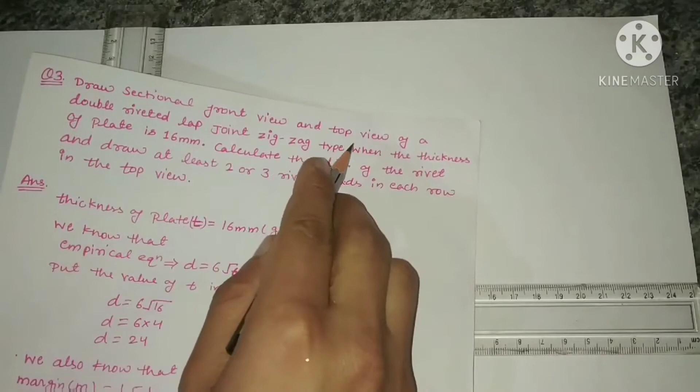So similar to the second problem, we are going to solve a double riveted lap joint. But the difference is, in the second problem we discussed a double riveted lap joint of chain type, and in this session we are going to discuss a double riveted lap joint of zigzag type. Now let us look into the question.

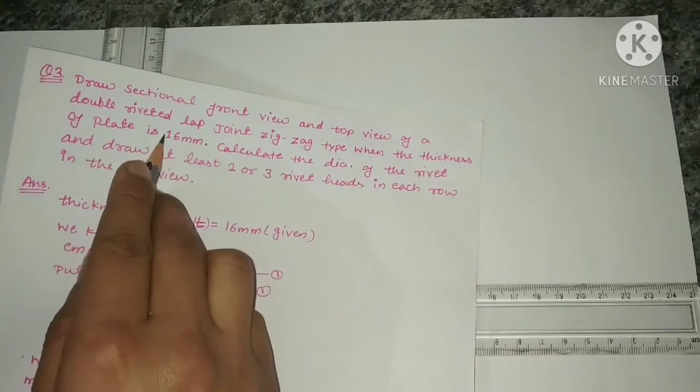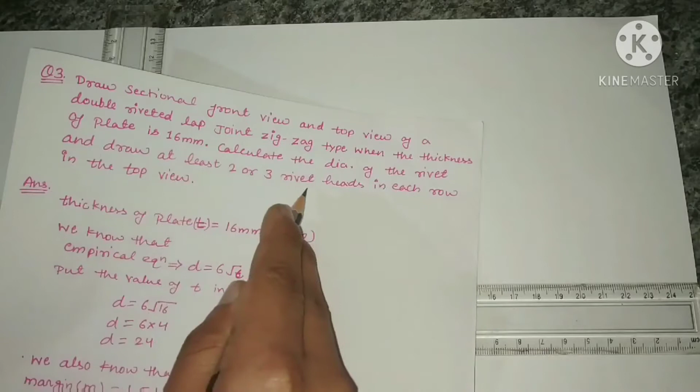Draw a sectional front view and top view of a double riveted lap joint, zigzag type, when the thickness of plate is 16 mm. Calculate the diameter of the rivet and draw at least 2 or 3 rivet heads in each row of the top view. In this case, thickness of the plate is given as 16 mm. We are supposed to find out the diameter of the rivet.

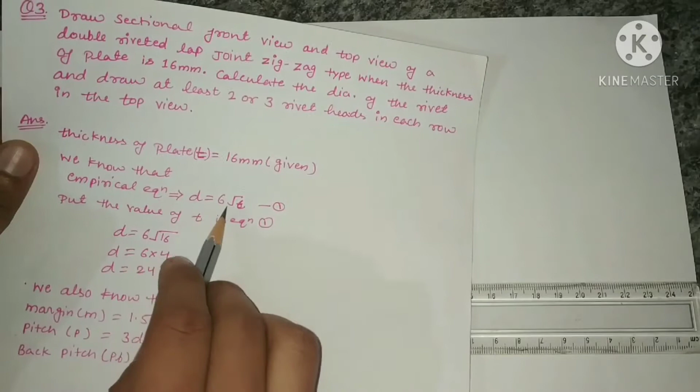So we know the formula, that is D is equal to 6 times root T. Substitute the T value, that is D is equal to 6 root 16. Root of 16 is equal to 4. D is equal to 6 into 4. You will get the value as 24. So the diameter of the rivet should be 24.

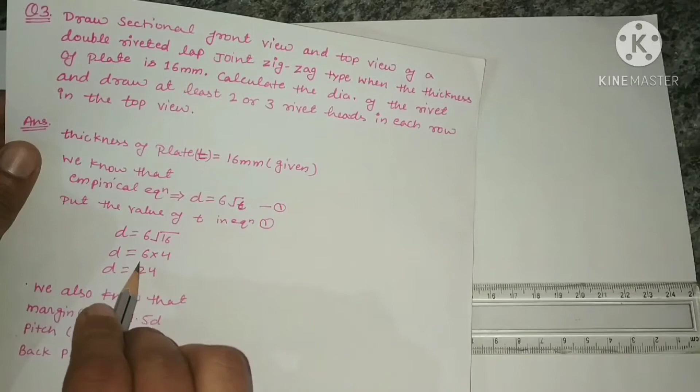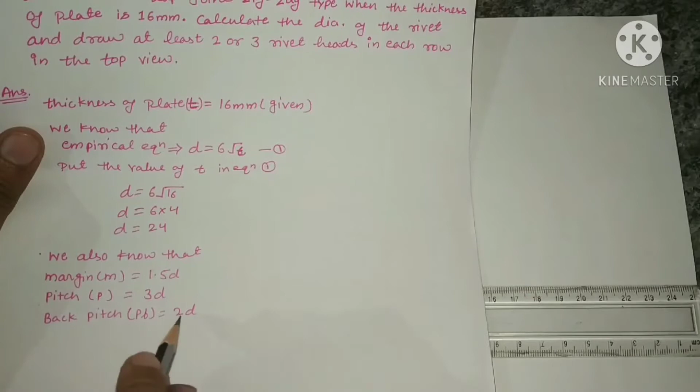Now calculate the margin. Margin is equal to 1.5 times the diameter, and pitch is 3D, that is 3 into 24. Here diameter is 24, so instead of 18 substitute it as 24. And back pitch, that is the distance between two center lines, is equal to 2 times the diameter. So 2 into 24 is 48 mm.

So to start with the construction of rivets, as a first step, draw a vertical line. This is a double riveted lap joint and it is of zigzag type. All the steps will be same, only in the top view we are going to make some minor changes. So consider a straight vertical line, and by considering the back pitch, that is 2 times the diameter, 2 into 24 is 48, consider the distance of 48 mm and draw a second vertical line. These two lines help us in identifying the center lines of the rivets.

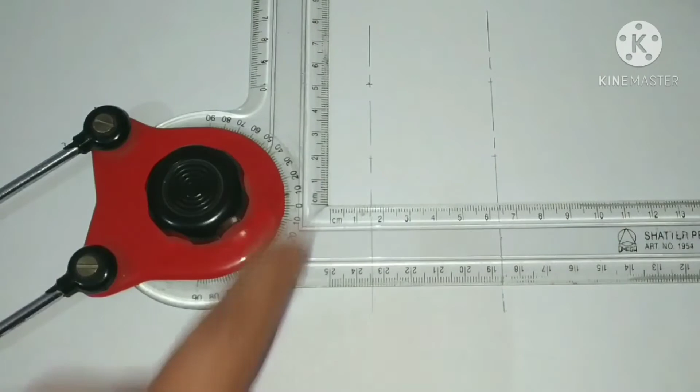By considering these two center lines as a reference, consider the thickness of the plate now. That is, mark any point on the top of the center line, measure 16 from that point and draw one more point. This gives you the height of the rivet. Now this 16 mm will help you to draw the plates. We have to draw two plates. Each plate is of 16 mm thickness. So you should draw 16 plus 16 as the height of the rivet.

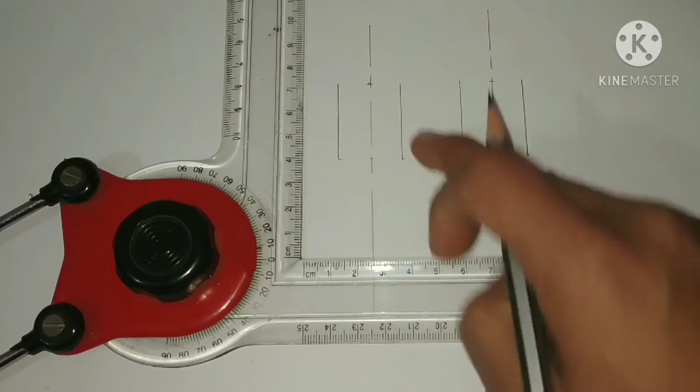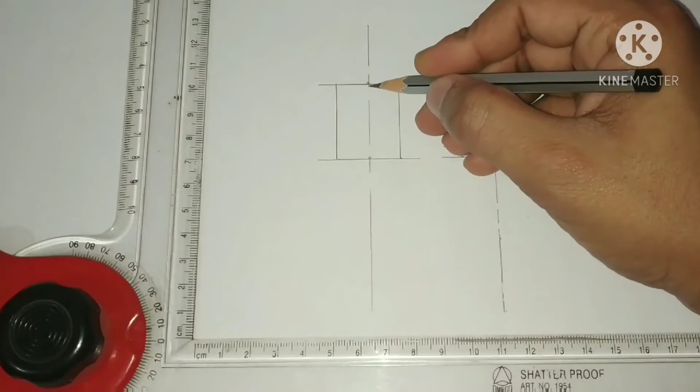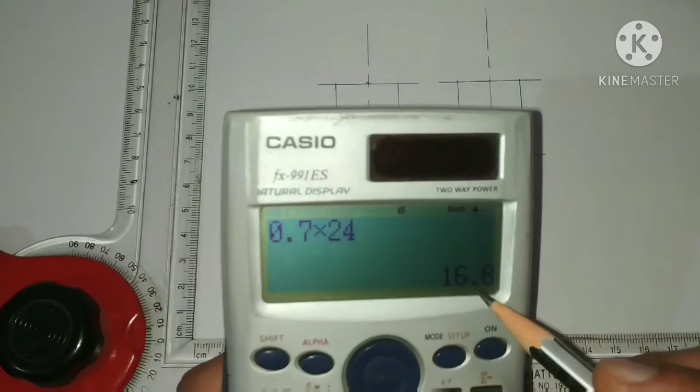So draw 12 on the left side and right side of the center vertical line. And in the same way, after drawing these lines, construct the rivet head. That is, after completion of the rivet body or shank, draw the rivet head. Now again we are going to make use of the formula 1.6 times the diameter, 1.6 times 24. Draw a straight line at the extreme ends of this rivet body. From there again use the arc method or construct a rectangle. Here it will be 0.7 times the diameter, 16.8.

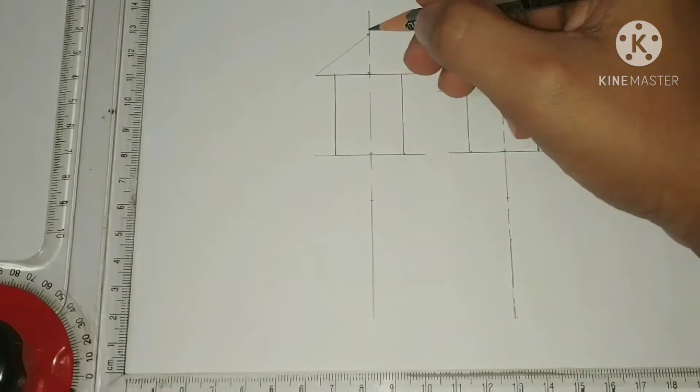So instead of the arc method, here I am going to explain a rectangle method. Just complete this rectangle of 1.6D into 0.7D. After constructing this rectangle, identify a point on the center line and draw a semicircle. This will simplify the problem of drawing the rivet head.

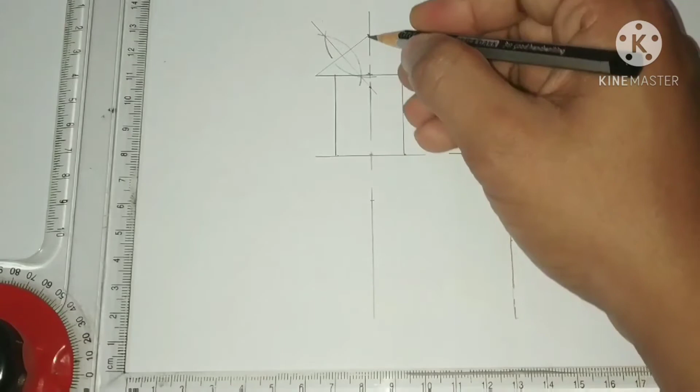In the same way, you have to draw the rivet heads for both the rivets and on both the sides, on the top side as well as on the bottom side. You are going to make use of the same method.

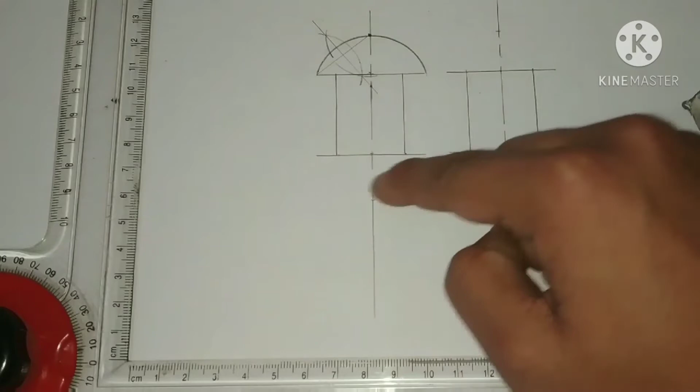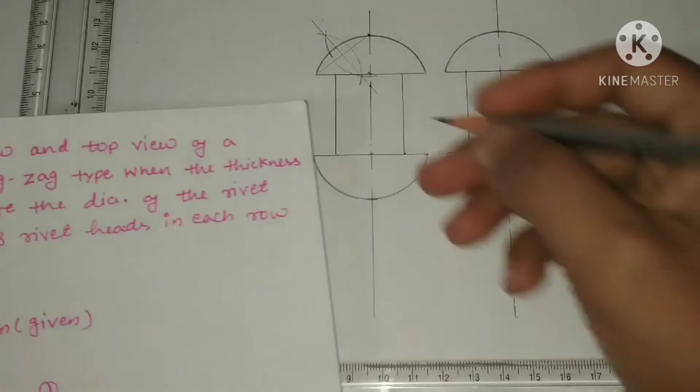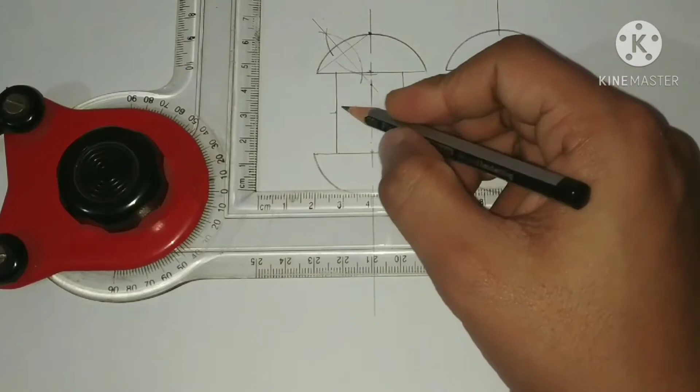After completing the rivet heads, now draw the plates. What is the thickness of the plate? Here 16 mm, that is 1.6 centimeter. Now draw a center horizontal line as a reference. Then consider 16 mm below and above the horizontal line. It will help you in drawing the plates. And similar to our previous problems, one edge of the plate should be slant and the other edge should be drawn with the help of a spontaneous curve.

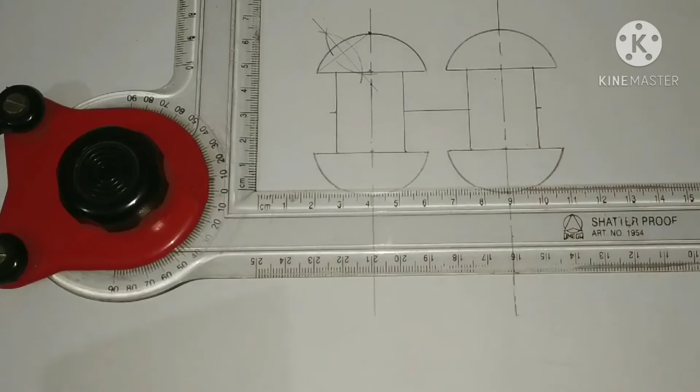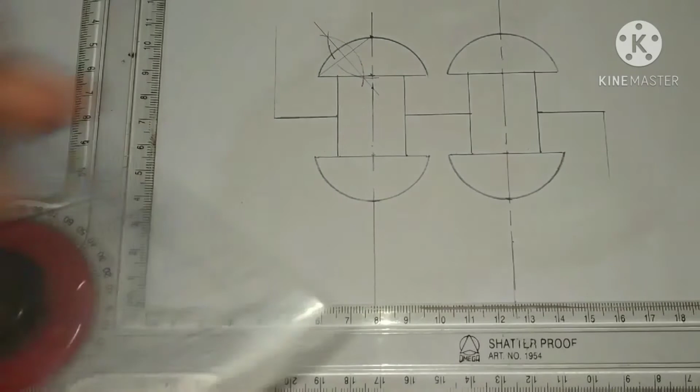Now calculate the margin. To draw the ends of the plates, we have to consider the margin, that is 1.5 times the diameter, 1.5 into 24, value is 36. So from the center point of one rivet to the edge of the plate should be 1.5 times the diameter. You can apply this margin on both sides, for the left rivet as well as for the right rivet, to identify the extreme edge or the slant edge of a plate.

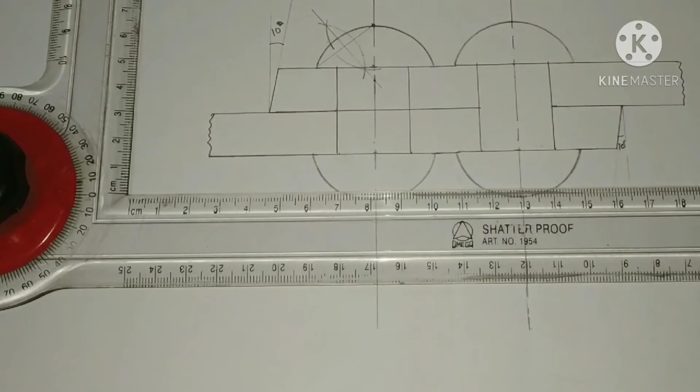Now shade the plates with the help of diagonal lines. Please remember, you have to use diagonal lines, not straight lines or horizontal lines, for shading purposes. So here we are highlighting the rivets and the edges of the plates, or boundary of the plates, as well as the boundary of the rivets.

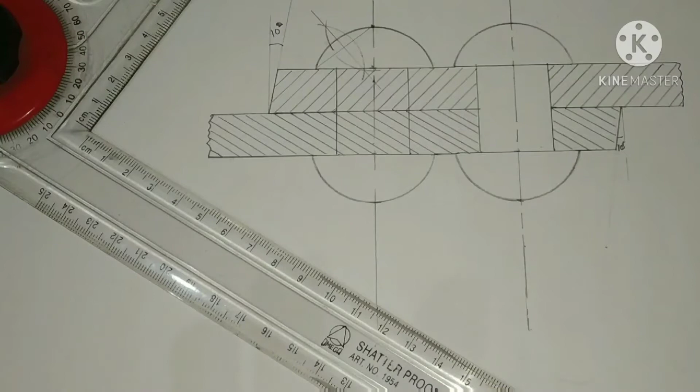So this completes the front view of a double riveted lap joint. Now I mark the dimensions, that is margin, back pitch and the thickness of the plate. Now let us look into the construction of the top view.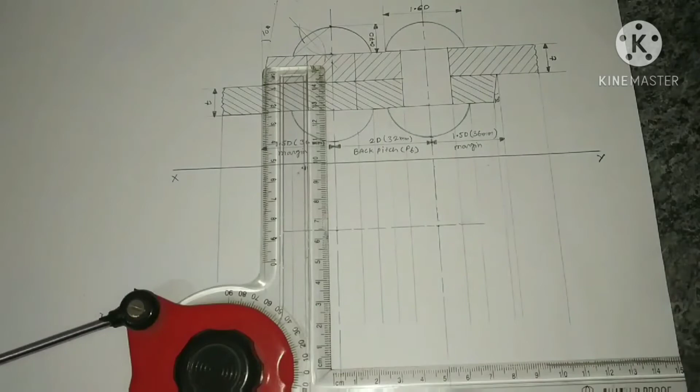To separate the front view and top view, draw an XY line, that is a horizontal line. Now after considering this, draw a horizontal line on the top view. Now consider your back pitch, that is 3D, and the value is equal to 3 times the diameter. 24 into 3 is equal to 72.

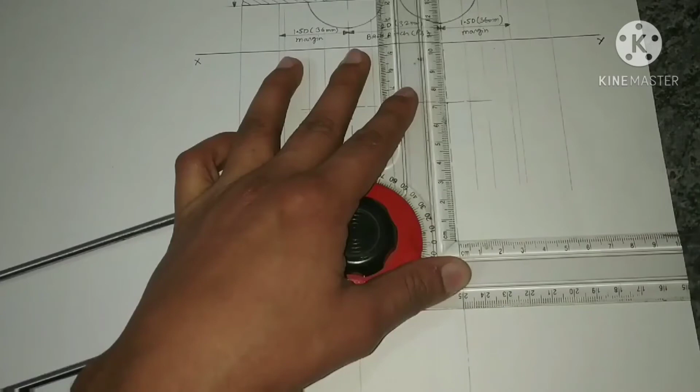Now draw one more horizontal line by considering the distance between these two horizontal lines as 72. This is nothing but your back pitch. You are going to get the centers of the two circles in the top view. Again, you have to draw one more horizontal line at 72 mm.

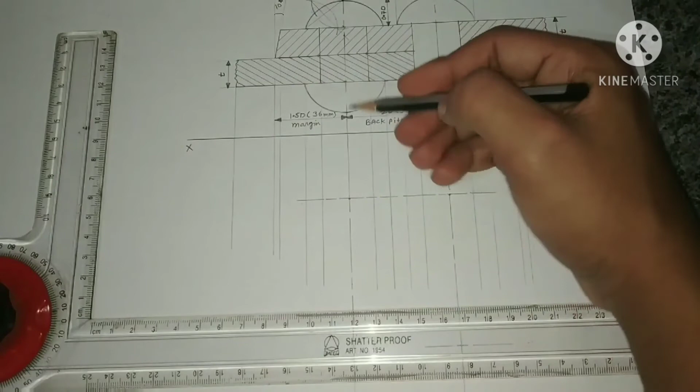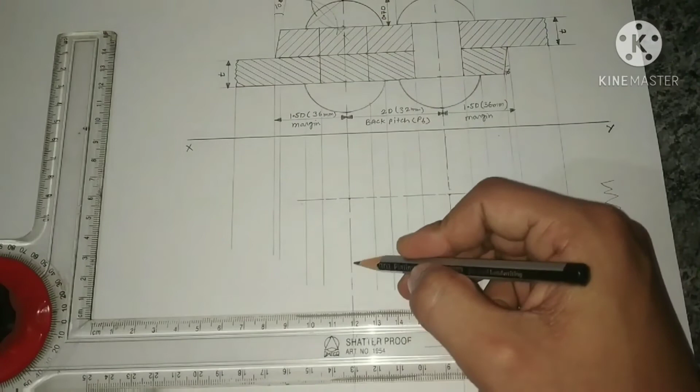This particular question statement is of zigzag type double rivets. So the rivets should be arranged in the form of zigzag, that is in the form of Z. So one center point you can consider on the first vertical line or the left vertical line. Then the circle on the second vertical line should be between these two points.

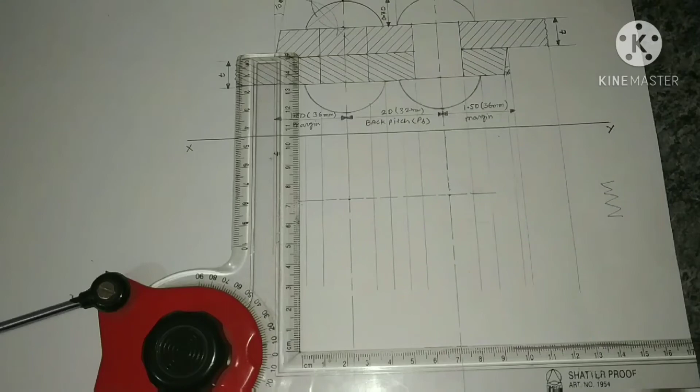Now observe the video. I am going to draw the inner and outer circles on the first vertical line as well as on the second vertical line. But the difference is, instead of considering 3 and 3, I am going to consider 2 circles on the left vertical line and 1 circle on the right vertical line.

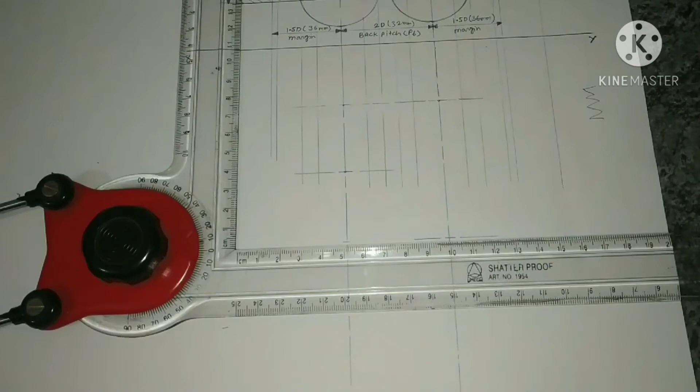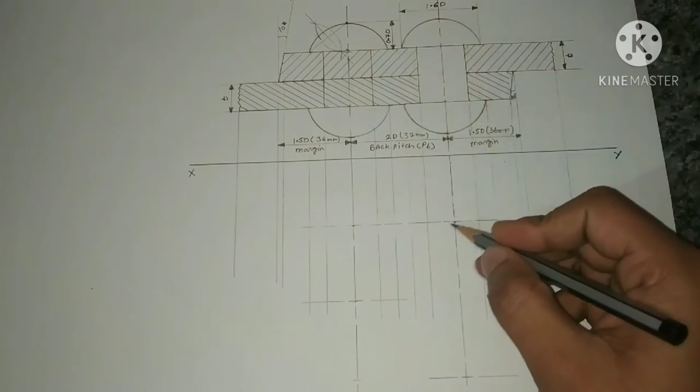Or else the second method is considering 3 circles on the left vertical line and 2 circles on the right vertical line. In the question statement it is given, show at least 2 or 3 rivet heads. Now consider the diameter of the rivet head and draw the outer circle, and consider the diameter of the body and draw the inner circle with the help of a dashed line.

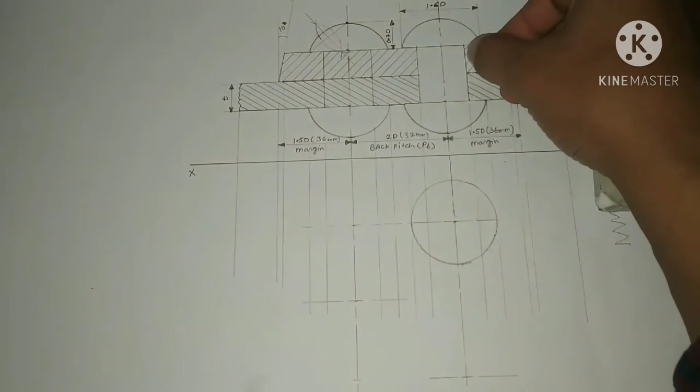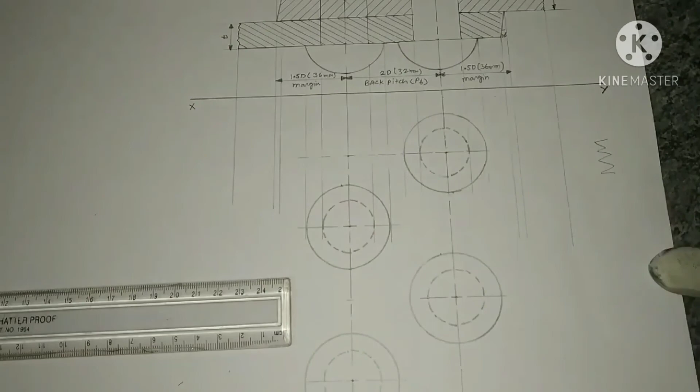So this is how you have to draw rivets in a zigzag manner. You can refer to the textbook Machine Drawing by ND Bhatt for more problems. And here it is not always necessary that the diameter should be 24 or 18 or 9. Based on the formula you can calculate and you can solve any number of problems.

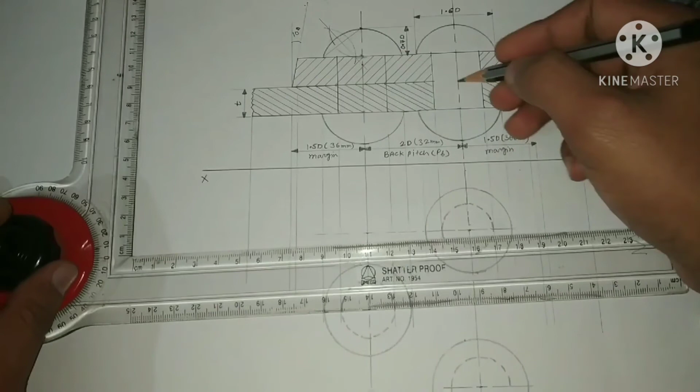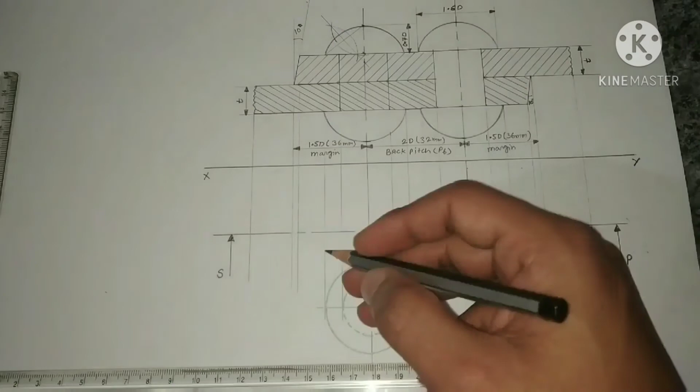After completing the circles, you can mark the dimensions, that is your margin, diameter of the circles, as well as the pitch and the transverse pitch. Here transverse pitch is the distance between the circles on two vertical lines. Instead of considering the same vertical line, measure the diagonal distance, considering one circle on the left vertical line and the second circle on the right vertical line, that is your transverse pitch.

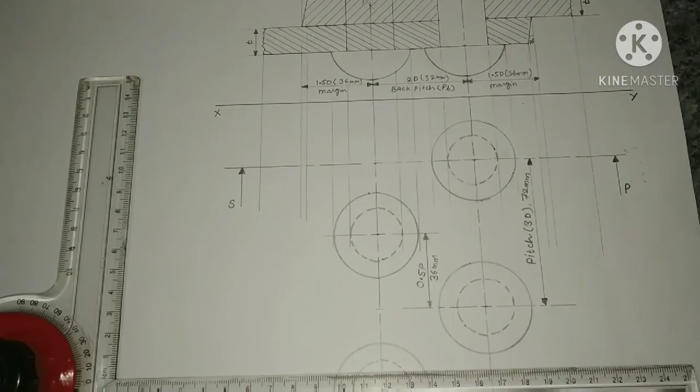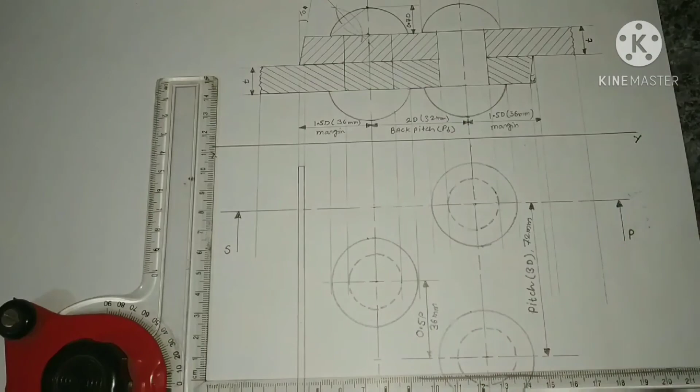After marking the dimensions, now complete the top view by projecting the plate edges. Project the lines from the edges of the plate. If it is a slant edge, project it with the help of a continuous thin line. If it is a curved edge, use curved lines. And join the bottom parts.

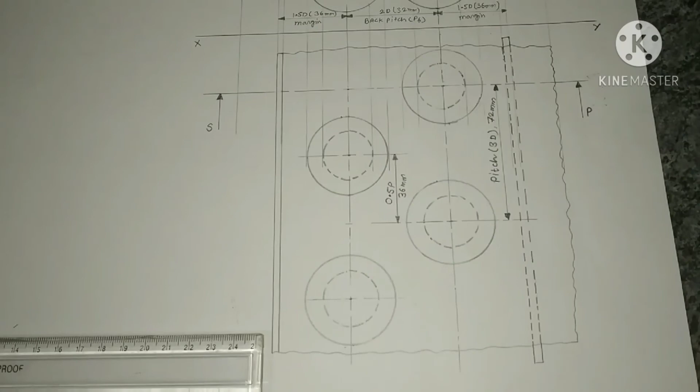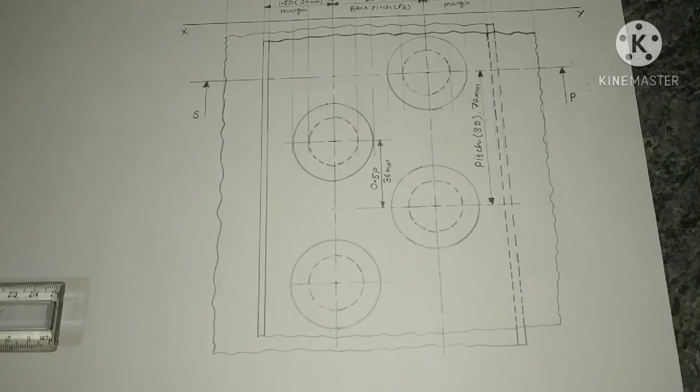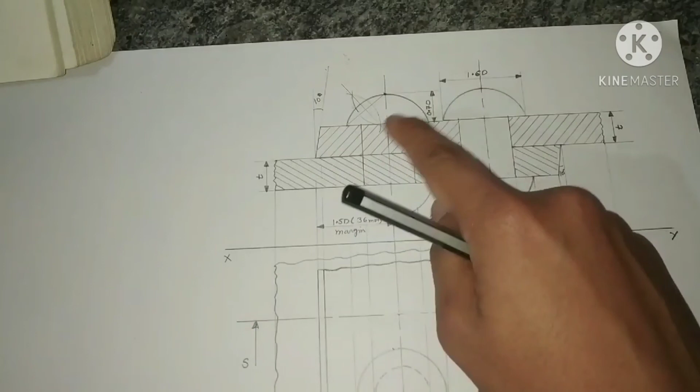This completes the top view of the rivets. Here we have shown only 2 rivets in the top view because of page size constraints. You can show 3 rivets if you are drawing it on the drawing sheet. For A4 size, you can show maximum, I think, 2 rivets, because here we are considering the plate thickness as 16 mm and your values are changing from 9 to 24. It is not a problem to show 2 rivets.